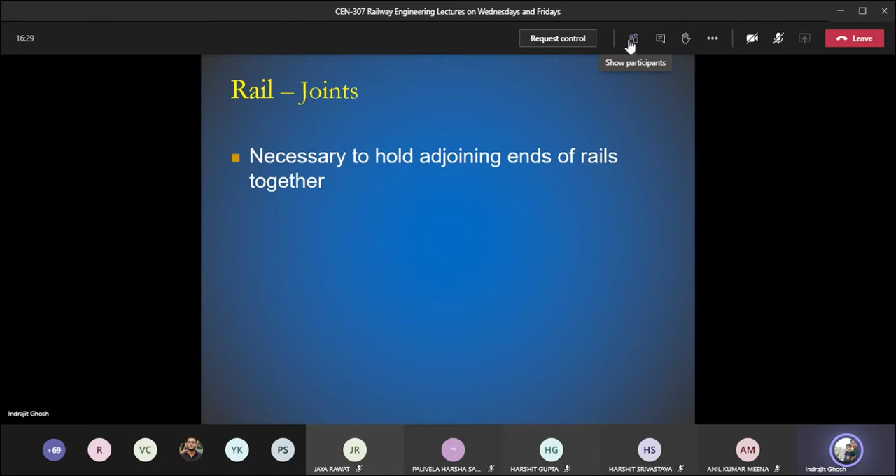So the next topic that we are going to discuss, again related to rail, is the joints of the rail. First of all, what is a rail joint and why do we need rail joints? Why is there an occurrence of rail joints? The first thing is that we have seen several times that rail is of finite length.

There are several disadvantages associated with very long rail. So we need to put two rails, and at the same time we need to make sure that the adjacent ends are at the same place. We should have some sort of mechanism that maintains the correct position, both in the horizontal and vertical plane.

So what does it mean by vertical? If this is the joint, if there is a gap in between, you need to make sure the height here and the height there are going to be the same. You use a fish plate with nuts and bolts, but you need to make sure that this level and the level of the previous rail are going to be the same. So this is in the vertical plane.

And what about the horizontal plane? If we have a rail like this, and we have the other rail, we have to make sure that the rail heads, web section, foot, everything is at the same level. Otherwise horizontally you will see the other head of the rail misaligned like this, which will create a lot of problems for smooth running of the train. There will be extra impact and extra force exerted by the wheel at the joint location, both in the horizontal and vertical plane.

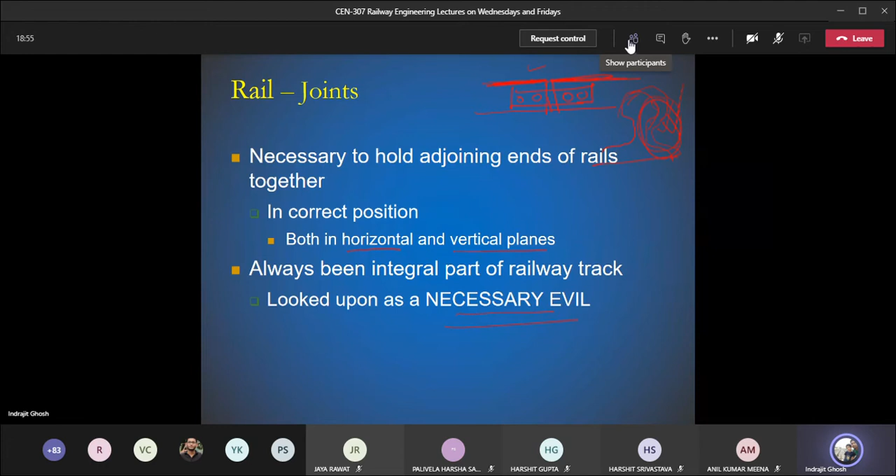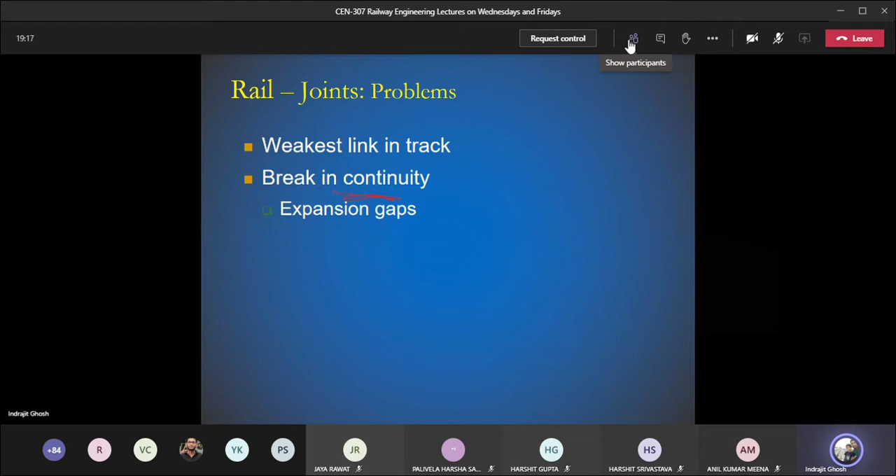So joints, what are the problems? I have two slides to talk about the problems. Weakest link, break in continuity. If it were a single rail there is no problem, but when multiple rails are joined at the joint location, continuity is broken. Now when continuity is broken, you need to think about the longitudinal stresses due to temperature variation. You need to keep a gap, known as the expansion gap, that will accommodate the expansion and contraction due to temperature variation.

There can be imperfection in levels of the rail head, horizontally and vertically. There can be problems, there will be blow of wheels. We have seen that one type of creeping is explained by what is happening at the joint, the percussion theory - so blow of wheel.

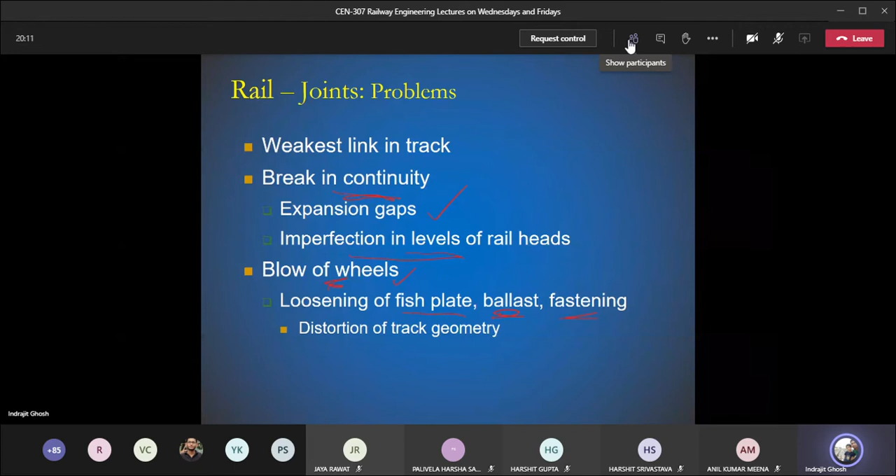Whenever there is extra force exerted at the joint location, not at other locations of the rail, there can be loosening of fish plates. There can be issues with the ballast underneath the joint, and problems with the fastening. Over time you need to make sure they are not loose and not coming out, because if those are loose, the track geometry will change over time, and if labor is not sent to ensure things are in proper order, there can be chances of accidents. Wear and tear of the rail, as we saw yesterday, means there will be extra force at the joints, causing metal loss at the joint location.

We have seen the battering of rail at the joint location, so track components are going to have wear and tear. At the same time, rolling stock is affected too - if fish plate nuts and bolts are not in proper order, if they're loose, or two rails are not horizontally placed properly, the extra jerk you feel at the joint location affects the health of the rail and the rolling stock, the train vehicle as well, because there are many moving parts that will create problems.

It's just like buying a new vehicle and driving on a road full of potholes, or where construction is going on and there's no street light so you can't see the road properly. Sometimes your vehicle can be damaged because you may not understand the depth of the pothole, so the health of the vehicle deteriorates. Similarly, in railway engineering, if the joint is not properly maintained, it can affect the health of the rolling stock as well.

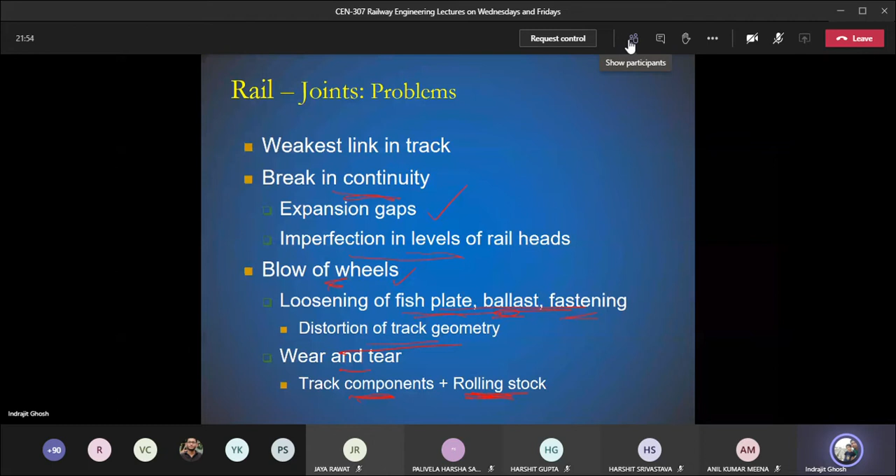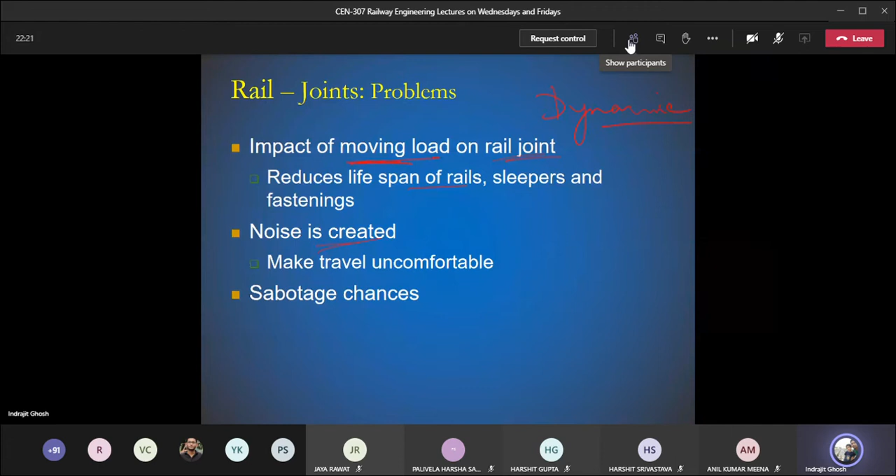What are the other problems? Impact of moving load on rail joints. As there is moving load, dynamic load, that reduces the lifespan of the rail, sleepers and fastening, particularly at the joint location. Noise is also created - when you're a passenger sitting inside the vehicle and you hear a noise, that is nothing but the wheel hitting the joint location.

So you feel uncomfortable. There are also sabotage chances - there can be a person who wants to damage the reputation of Indian Railways or terrorize people. What they can do is remove the fish plate, and once they remove it, they can remove the rail. I remember an accident in West Bengal, Jnaneswari, at the border of Odisha and West Bengal, where a train accident happened because a portion of the rail was cut. During investigation, they found that fish plates were removed and some portion of the rail was taken off. So if you don't send people to keep an eye, that's one problem. At the same time, the kind of devices we use are easy to remove, so there are chances of sabotage.

Increased fuel consumption - in case of roads, if you have a smooth road, your fuel efficiency will be comparatively good, giving better mileage. In railway engineering, it has been observed that more fuel is required if you have a greater number of joints on a track, because of the expansion gap. Extra force is required to hold the train over joints. These are the problems - there are several more, but only 8 to 10 are listed here.

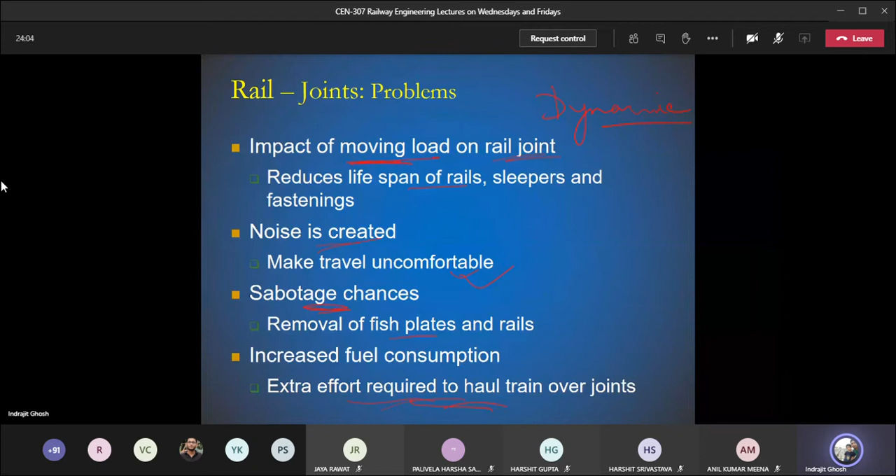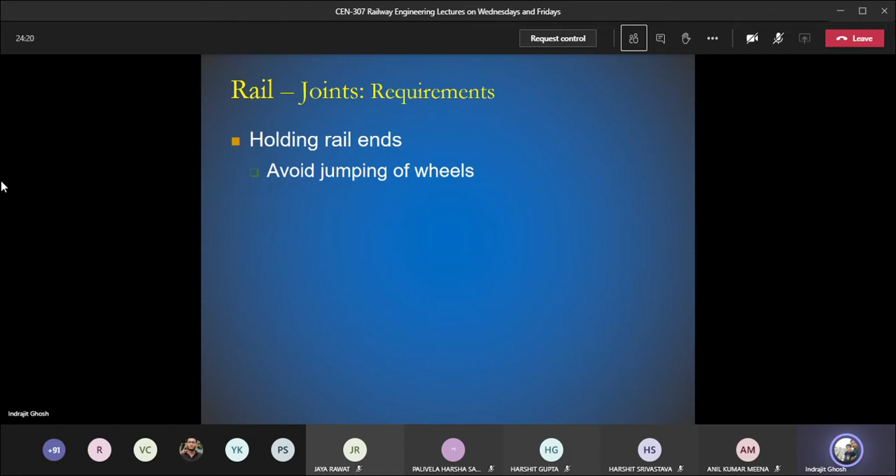Now, whenever we talk about this component of the track - joints - we need to think about the requirements, the purposes it needs to serve. The first one is holding rail ends together. If it doesn't hold the rail together, what happens? The expansion gap increases, the fish plate becomes loose, and the wheel jumps a larger distance - this can be in the longitudinal direction over higher distances, or even an elevation jump, a level jump. We need to make sure this kind of jumping does not occur.

Next, avoid deviation of the wheel from its normal path of movement. So if this is one rail and this is the other rail, if they are not joined very accurately and it moves to the side, then obviously the wheel has to deviate, and that is not at all welcome. So we need to avoid deviation of the wheel - it should move as it is, there should not be any deviation.

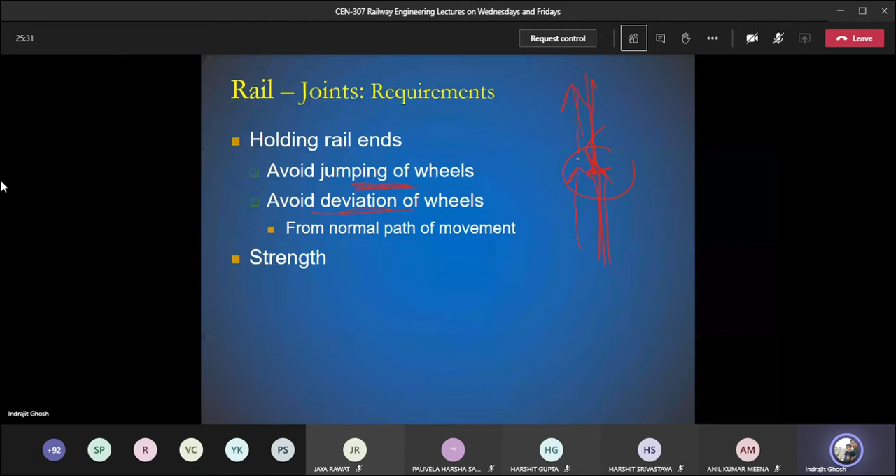Strength and stiffness - the kind of strength and stiffness the joint needs to provide should be almost equal to the normal rail. So two rails are being joined, here is one rail and here is another, and we put some extra material - fish plates, or welding, whatever you call it. We need to make sure the finished product provides the same strength and stiffness as the parent rails do. Expansion gap should provide enough space for contraction and expansion due to temperature variation - it needs to hold a certain gap in between.

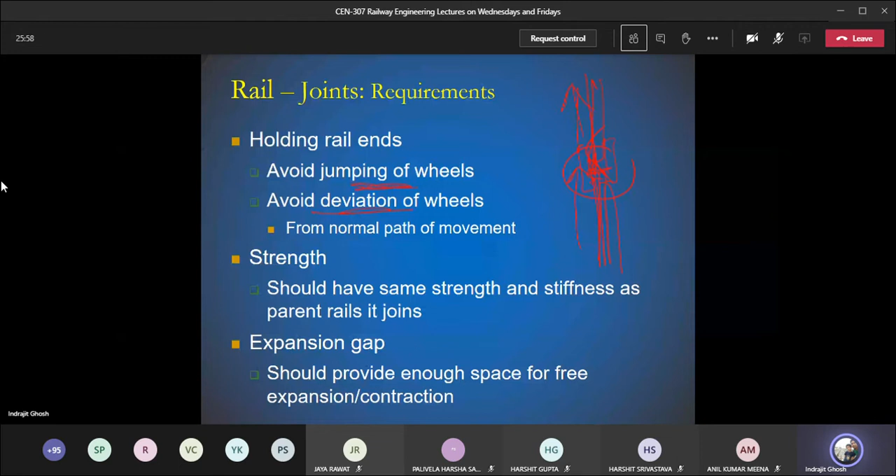Flexibility in terms of removal or replacement, so joints should not be such that yes, it is a weak point, but we are doing so many things at the joint. When the rail reaches its service life, we need to throw it out or go for renewal because the wearing is really high. It should not happen that you are scared of dismantling the joints, so you should have enough flexibility. The joints should not be so complex that renewal of the rail becomes a huge problem.

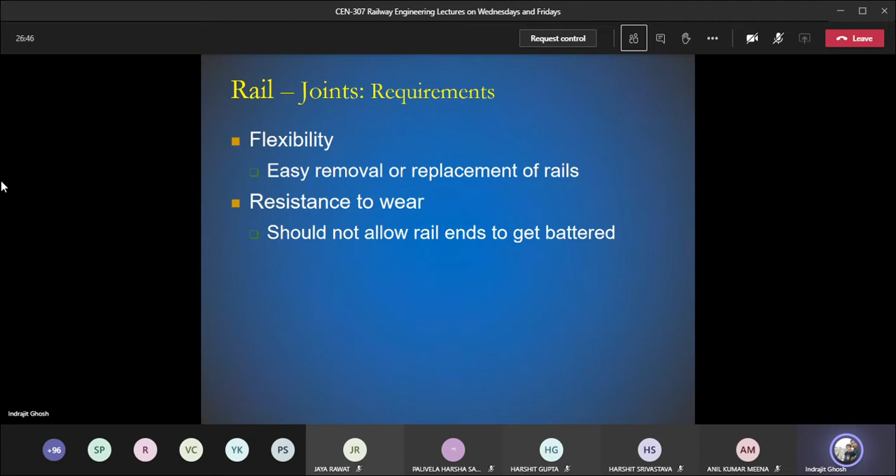Resistance to wear should not allow the rail ends to get battered. Yesterday we saw this battering is responsible when we talked about creeping. Wheel load comes with vertical and horizontal components, responsible for creeping in the rail due to percussion theory, and this causes a hammering action where the rail head gets flattened and battered. It should not allow the rail heads to get battered, so we need to make sure the joint is really strong and is not getting battered.

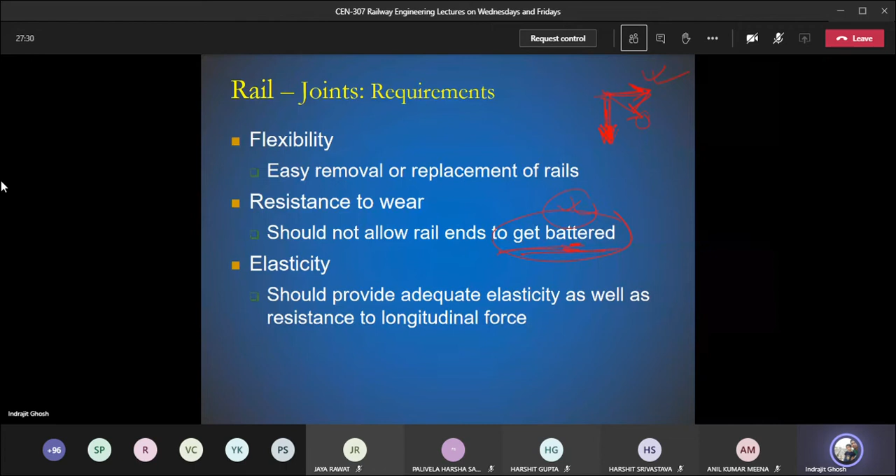Elasticity: provide adequate elasticity as well as resistance to longitudinal force, since the train is moving in a particular direction, so it should provide enough elasticity. And cost, the last one, no matter which track component you are discussing, you need to make sure the initial and maintenance cost is low. If you join Indian Railways later and want to use a modern term, you will say LCCA, life cycle cost analysis. If you do that, you should be able to say the life cycle cost is minimum.

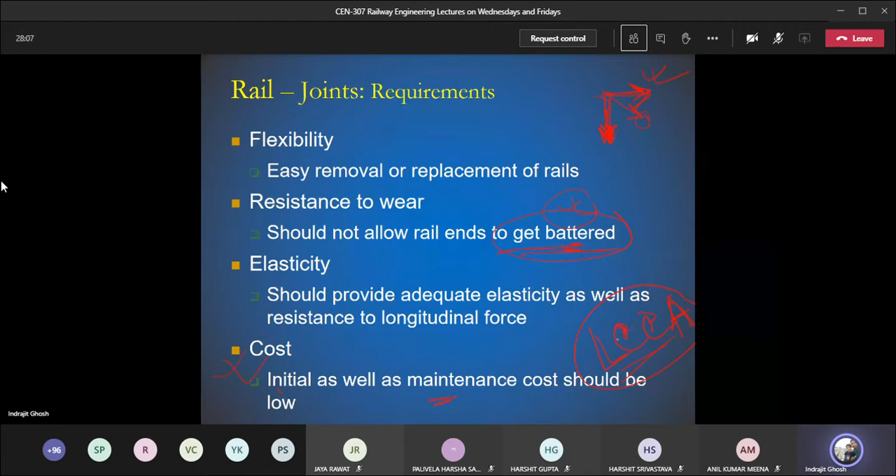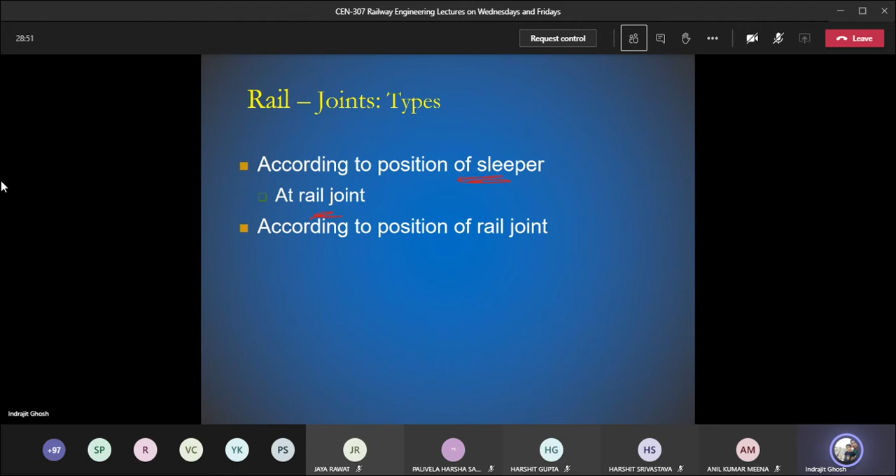Now let us see certain joint types. Rail joints can be classified in various ways. The first classification is based upon the position of the sleeper. The rail rests upon the sleeper, the sleeper rests upon ballast, and in between the two rails we have the joints. So based upon where the sleeper is, we have some classification regarding the joint location. The other classification is related to the position of the rail joint itself, where it is located. We will see them one by one, starting with the classification based on the position of the sleeper.

The first one is the supported joint. We have seen that the joint is the weakest location, there are several problems, nuts and bolts can become loose, and it can be taken away by people to cause trouble. So the original idea when things were being invented was that we can put a sleeper at the joint location, so the rail joint rests on a single sleeper. That particular sleeper is known as the joint sleeper.

So this sleeper is known as the joint sleeper, for the rail joint. It appears that we are making sure this location is not really a weak point, but it has been observed over time that because of moving wheel load, shock, vibration, expansion gap, the wearing and tearing is huge for this particular sleeper. Maintenance is a huge difficulty for this sleeper class. The sleeper posed as the joint sleeper needs to be renewed at frequent intervals, unlike other sleepers. So we stopped using it at present. It used to be one of the supported joints, supported with the help of a joint sleeper, but that is now obsolete and not used.

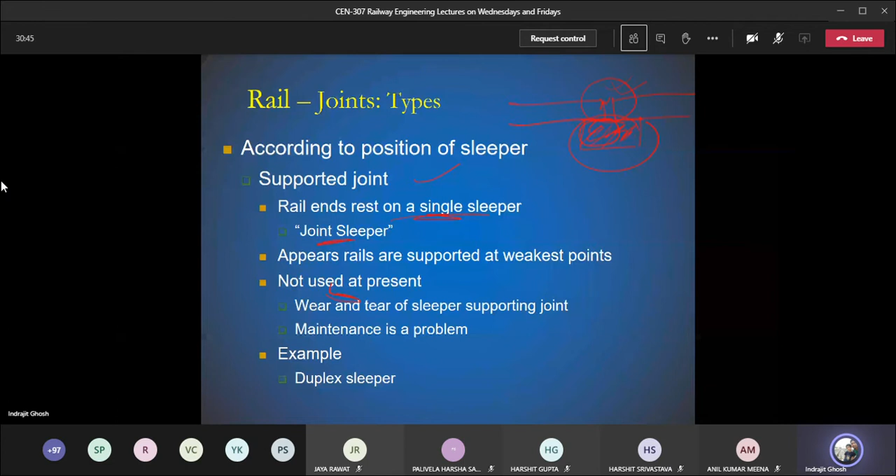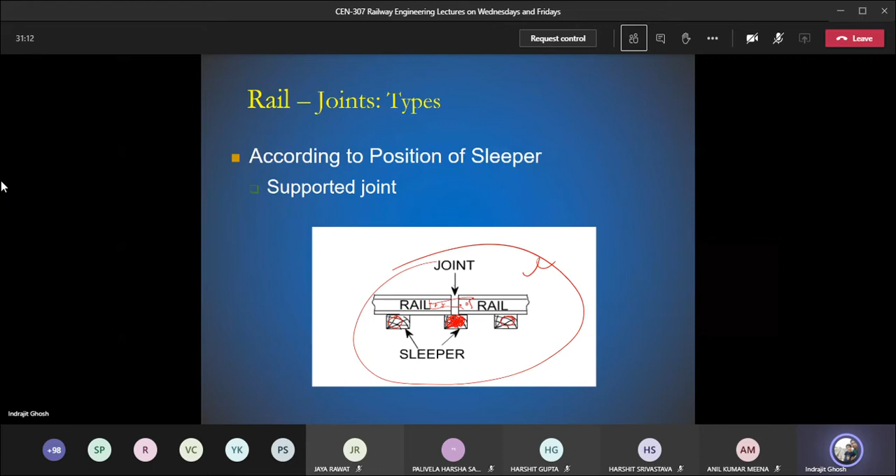The example is the duplex sleeper. There is one slipper, another slipper, and a third slipper, with the rail joint. It won't show the nuts and bolts, but they will be there. This is the joint sleeper and this is a supported joint. Maintenance of this sleeper is very difficult, that's why wearing and tearing is very high, and that's why we do not use it nowadays.

So what do we use nowadays? Any idea? Do we use a double sleeper, or a different kind of sleeper? Okay, do we leave the wooden sleeper and put an iron sleeper instead? Is it like that? What is your opinion? Can anyone tell? With respect to the position of the slipper, where it will be placed, or if there is a special kind of slipper, maybe made thicker, stronger, or of a different material. Any guess from your side?

The one which we use everywhere, which we see everywhere, used worldwide, is known as suspended joint. The rail ends, the joint location will be somewhere in the middle, in between two sleepers. So we have two sleepers on the sides of the joint.

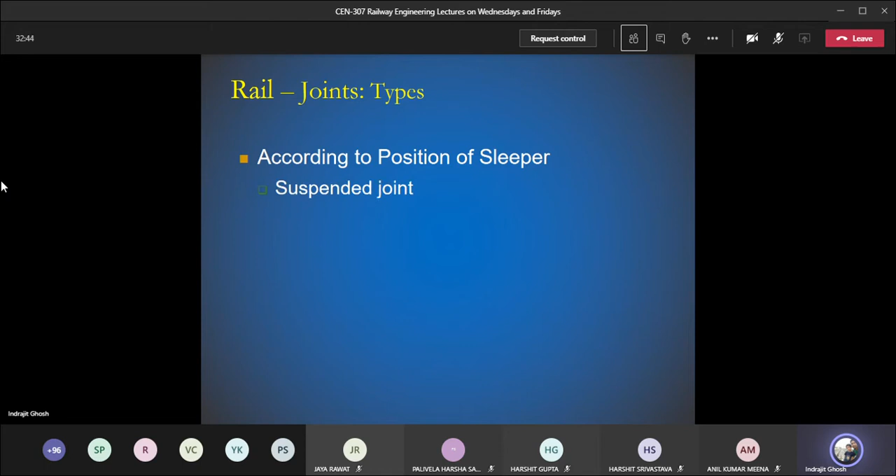So there is a cantilever portion. Let me draw a different diagram. We have one slipper here, we have another slipper here. Now if we join them, some portion of this rail is acting as cantilever, here also cantilever, and these are joined. So there is no slipper in between.

We have seen this photo earlier, right? We said that there is a special name for this particular slipper. What are the names of this slipper? If it is at the joint, we call it joint sleeper. When those are at the sides and it's a suspended joint with a cantilever portion, what slipper do we call them? What is the specific term we use to express the name of this slipper? Shoulder sleeper. Yes, shoulder sleeper.

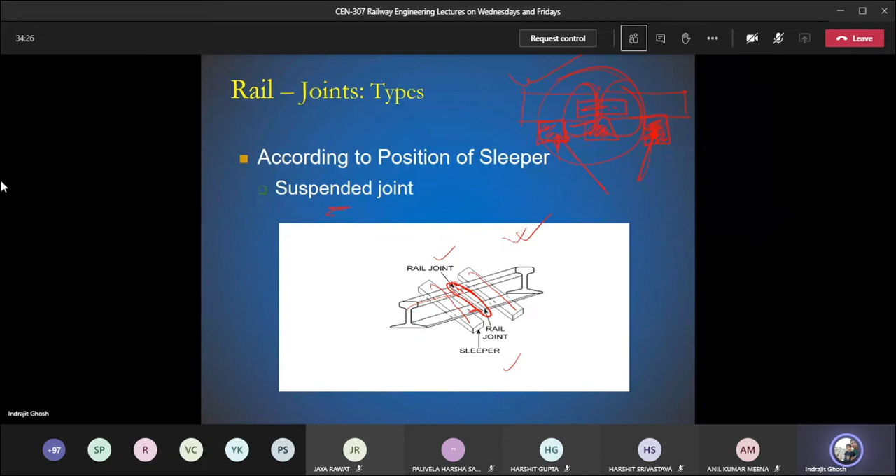We have seen shoulder sleeper when discussing sleeper density, the spacing between the shoulder sleeper, the intermediate sleeper, and other things. So that's why. This type of joint is really good and is used worldwide.

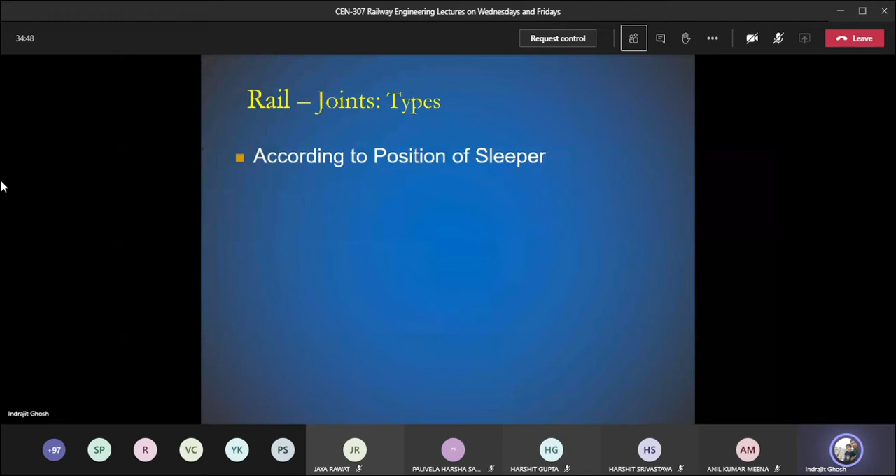Is there any other variation? In India, we do not have any variation, but if you go abroad, in some other countries with different track systems, you will be able to see some other special kind of arrangement.

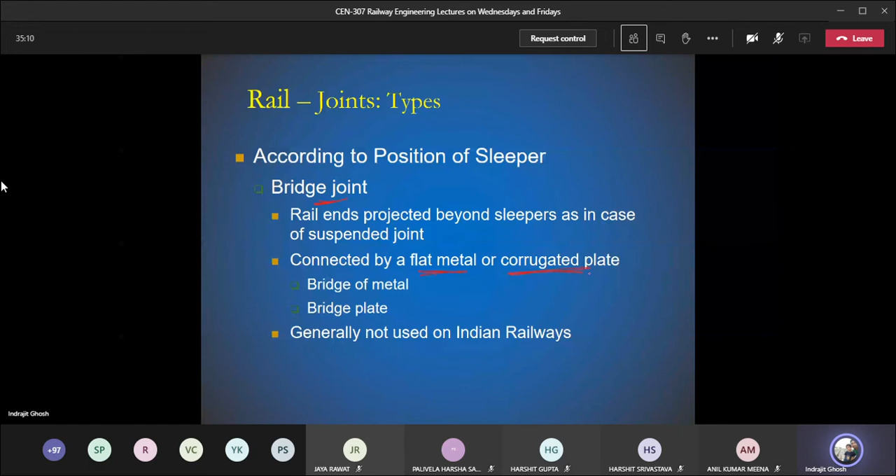The third one is bridge joint. So we have a suspended joint, but at the same time, in between the two sleepers, those shoulder sleepers, there is a connection made by a flat metal or corrugated plate - a metal sheet or corrugated sheet, as you must have seen from structural engineering knowledge. We call it either bridge metal or bridge plate.

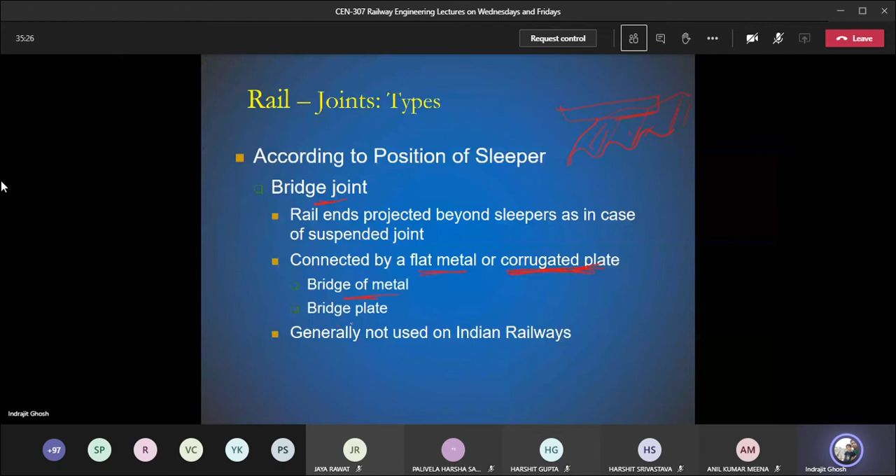Those are mainly available in the United States. Do you remember any particular instances where I talked about United States trains? What was the reference? Anybody remember? The kind of goods they carry - one of them carries heavier loads, and so the track structure is slightly different.

Yes, correct, absolutely. The reference was that the depth of the ballast cushion underneath the sleeper is going to be equal to sleeper spacing in case of the United States. But we do not follow this in India. The reason is that in our case, the sleeper density is comparatively such that the distance between the two sleepers is larger, but smaller in their case.

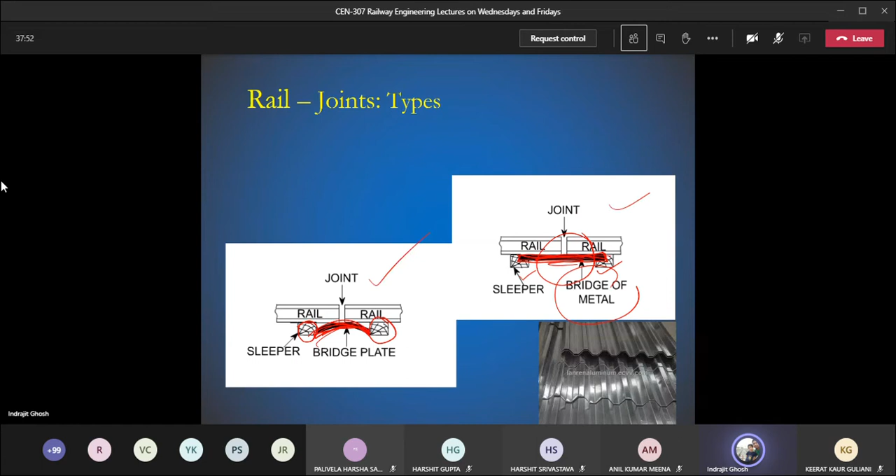The reason is that they mainly use trains for movement of goods, for movement of freight. So when they transport bulky amounts of material, heavy volume, huge weight, they may require some extra support at the joint. That may be the reason for this bridge plate or bridge metal. This is not available in India - we do not see it, but it's available particularly in the United States.

Now next classification is according to the position of the rail joint. The last one was position of the sleeper - when the sleeper was below the joint, we call it supported. When it was cantilever, we call it suspended. When we have one extra sheet of metal, we call it bridge. Bridge is a modification of suspended.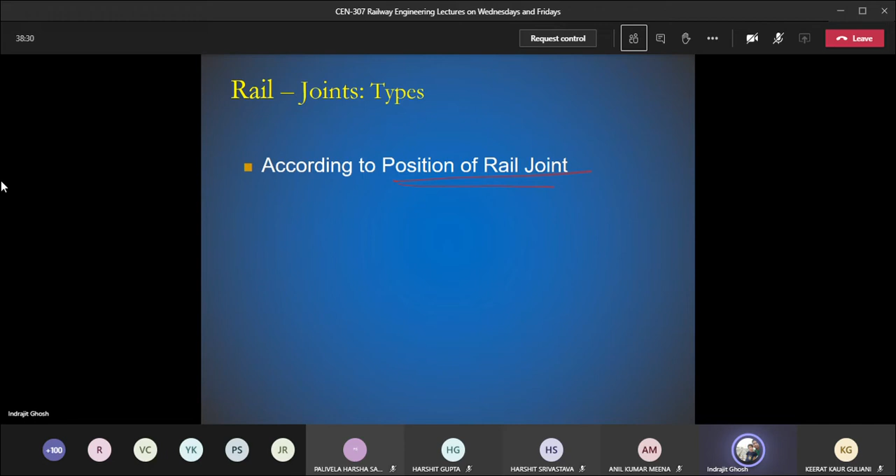Now I am asking you with respect to the rail joints, how it is going to vary. The first one is square joint. Let us see here a photo of square joint - the track joint on this side is exactly opposite of the joint on the other side. This is known as square.

What could be the other classification? It seems that the other classification will be such that the joint is not exactly opposite to the other joint, right? If it is not happening, we will not call it a square joint. It is kind of here, here, here, here, here, here. So when we have something like this, we call it staggered.

Staggered. S-T-A-G-G-E-R-E-D, staggered. So staggered joint, where is it common?

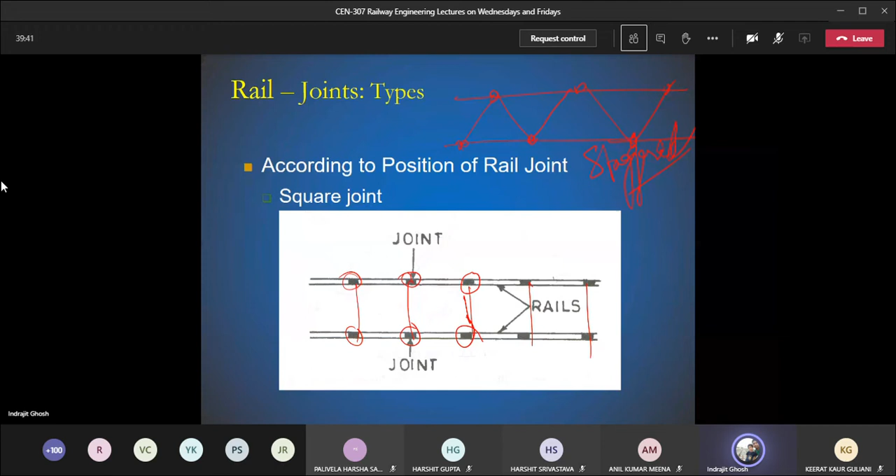In case of... when I will be showing you the photo, you will be able to understand. It is at curved location. When we have a curve, and we have laid the rails, we need to make sure that the joints are not opposite to each other.

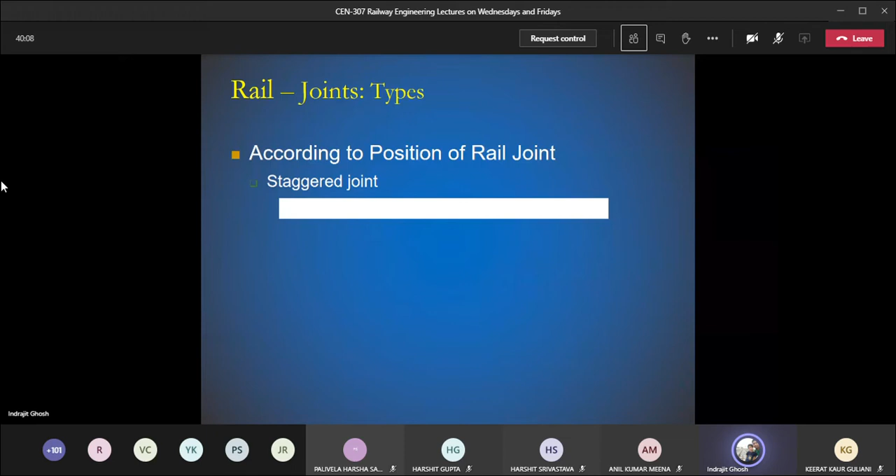What is the reason? The outer wheel would be moving slightly, covering a larger distance in the same amount of time. So you need to accommodate for that difference by creating that gap in the joints - basically in order to impede the effect of the centrifugal force.

So somewhat staggered. In case of highway engineering, did you listen to the word staggered? Suppose you have a junction, one road crossing another road - we call it 90-degree intersection, right? So if we have a road crossing like this, what do we call it? What kind of intersection?

Skewed, right. And what about this? This is known as staggered intersection. So 90-degree perpendicular to each other is one type, this one is skewed with a certain angle, acute or obtuse.

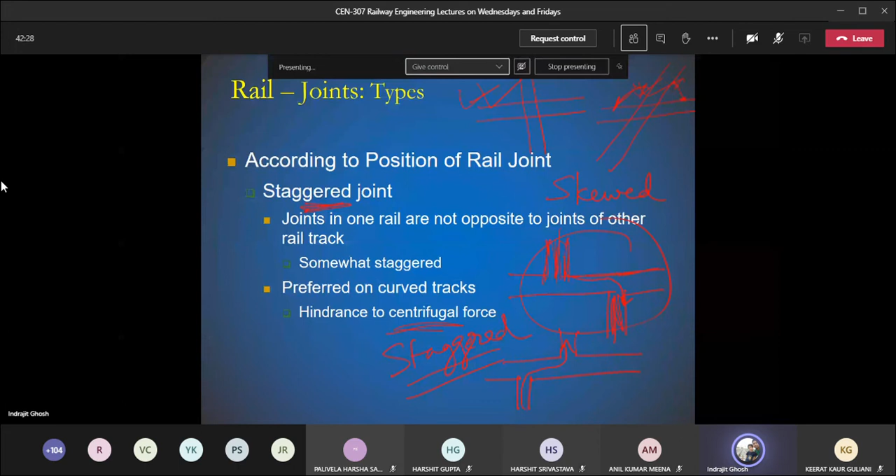And when we have one road, but at the particular junction, these two roads are not opposite to each other - rather, the person coming from this road who wants to go there has to come like this, take a right turn and go like this. Similarly, one person wanting to go on this particular road has to follow this path. So this kind of intersection is known as staggered intersection. So staggered joint, all of you can remember, is common in case of curves.

Now let us directly come to the welding of rails. So how would it help in hindering the centrifugal force? What is the effect on centrifugal force?

Centrifugal force is a tendency that the vehicle might move towards the outside of the curve - it has a tendency to get pushed out. So if you have staggered joints, shouldn't it be more difficult, because now both the wheels will... oh okay, we're talking about the joints. Yes, we are talking about the joints.

So if centrifugal force is being applied here, we have one weak point here, and another weak point here. That's why we got rid of this, and we have one here, another there, another there, another here.

So let me discard this. Just hold on, okay.

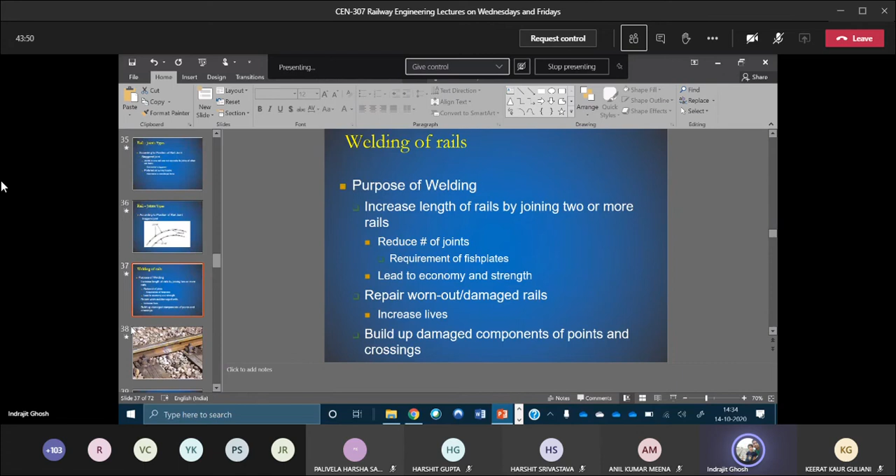Yes, so welding of rail. Now, one thing you can observe - I did not discuss the things we see in the joints. I am not going to talk about the fish plate, nuts and bolts and their specification now, because that will be discussed during the discussion of fastening. So we are directly going to the welding of rail, which is done at the joint location.

So purpose of welding - there are certain purposes it is going to serve. First one is that though I am not going to show you the joints, you can say we are trying to get rid of the joints. We are putting some kind of material, and at the same time we are trying to save our cost. Why?

At each joint you need to put fish plate, nuts, and bolts, and at the same time, you know that they can loosen and cannot be at their initial health over time. So you need to go for regular maintenance. If you sum up all those costs, you will be able to see that you will save some money if you go for welding.

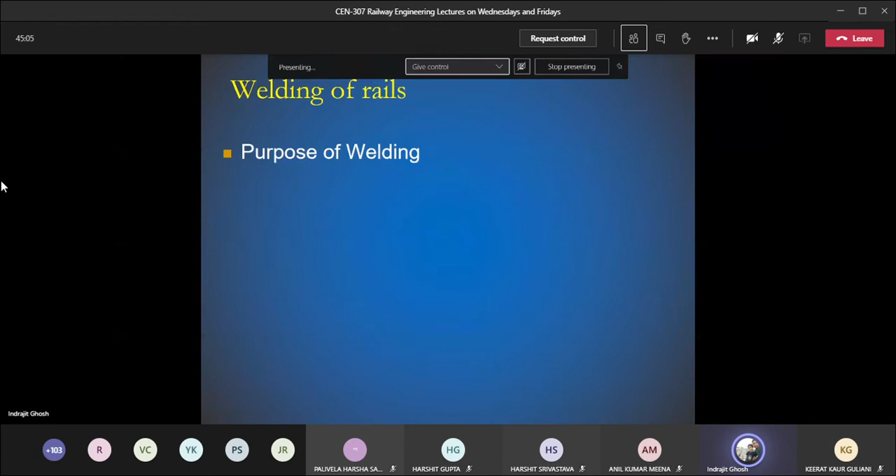So let us see some points. Increase length of rail by joining 2 or more rails. Until now we have talked about 2 rails, but with welded rails, there are instances where we join many rails. So we are reducing the number of joints, and we do not need as many fish plates, nuts, and bolts as we were requiring earlier. This leads to economy as well as strength.

Why do we say strength? Because the material we are using, though it seems to have the same property as the original rail, is joined by nuts and bolts fixed to the rail with wrenches, screwdrivers, and other tools. Over time, due to vibration and dynamic loading, they become loose, so strength will not remain as it is. But when we go for welding, it provides better strength.

Repair of worn out or damaged rail. We have seen that in some cases when there is wear and tear and metal loss, we throw away the rails, or replacement and renewal of rails goes on. But in some cases we can repair the worn out or damaged rails, and in that way increase their service life.

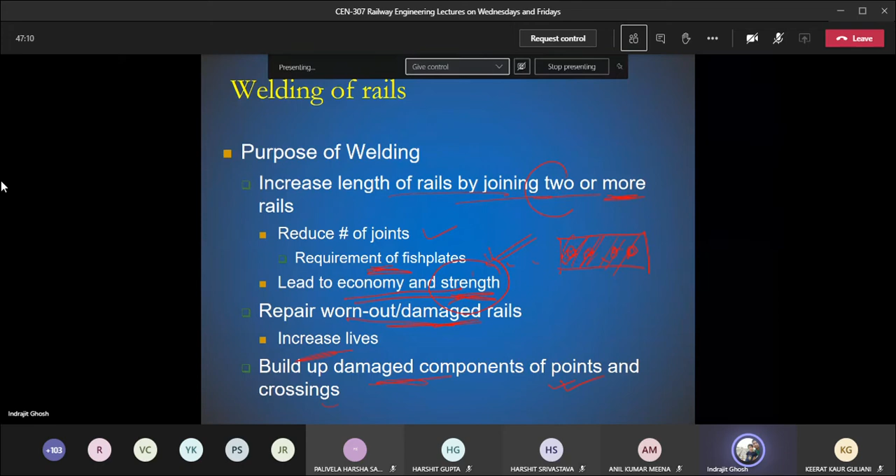You may recall, when we talked about the first method of reducing creeping, we said pulling back the rail, though it is not very successful. So we sometimes use crowbars and hooks, putting the bars and hooks through these holes, while some people hold the other side of the rail, and we are able to drag it.

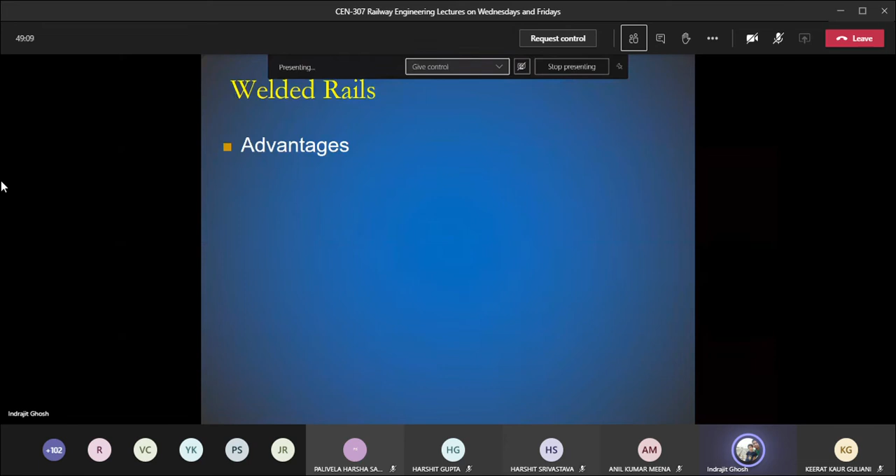Welded rails have several advantages: they increase life of rail, increase strength, and reduce construction cost. You may think there will be some kind of setup needed to go for the construction cost or the fixing of 2 rails with the help of welding, but there are several methods of welding, and nowadays we could reduce the cost drastically.

So now for every 12 to 13 meters we have one rail on this side, one joint on this side, another joint on the opposite side. If you calculate the cumulative expenditure for all of this fishplate, nuts, and bolts, you will see that construction cost is going to be lower in case of welding. Even the maintenance cost is going to be lower because you do not need to send people as often.

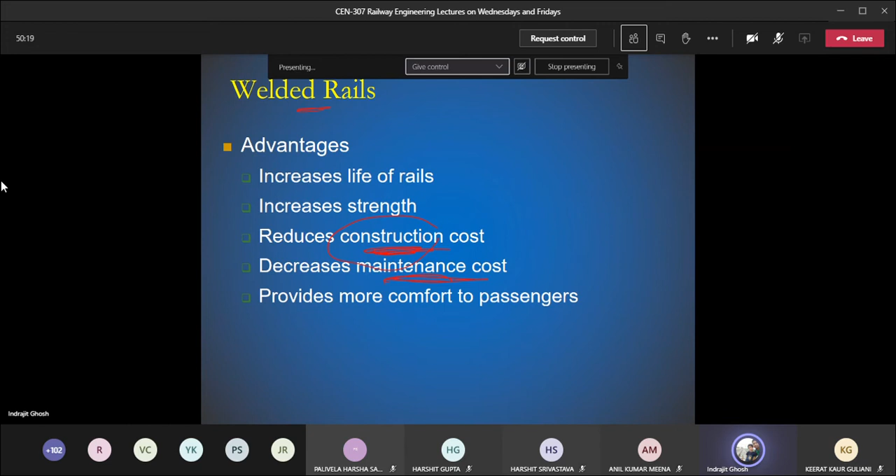Welding provides more comfort to the passenger because the wheel is not moving along the gap left for expansion and contraction. It also reduces creeping, because one theory, the percussion theory, says that at joints there is wheel load, causing creeping. Even longitudinal stresses generated due to temperature variation can cause creeping, and we have seen accidents where the line buckled due to this. Since those joints are gone and we have put metal, it reduces the creeping.

Welding also reduces risk of sabotage and accidents. For sabotage we cannot do much, only proper surveillance or maybe a very complex kind of setup at the joint. As for accidents, if we are not sending people quite often to the site, there will be fewer accidents.

Hey, please mute yourself. Just hold on, I need to mute him. Okay, I think he's gone.

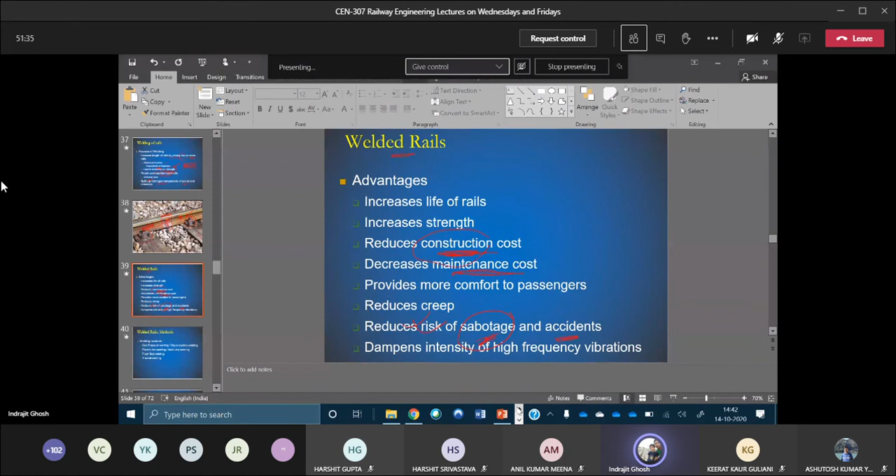The last benefit is that welding dampens the intensity of high frequency vibration. There will be shocks and vibration generated because of the joint, but when we have a welded joint, that reduces the intensity of the vibration to a great extent.

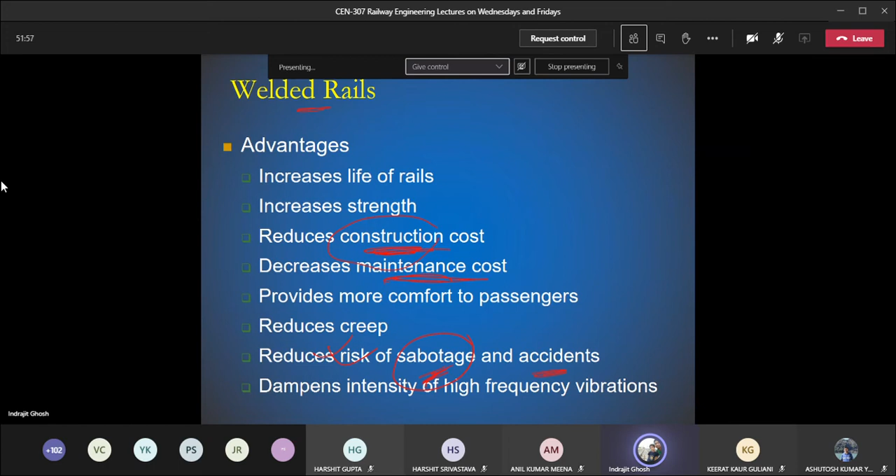There are several welding methods. We will not go through them the way mechanical engineering people do, but roughly discuss their pros, cons, quality, and whether they can be done at the site or have to be done at the plant itself. First is gas pressure welding or oxy-acetylene welding, where we use oxygen and acetylene gases. Second is electric arc welding, which involves electricity as well as metal. Third is flash butt welding, involving flashing, fusion, and smoke coming out. Last is Thermit or chemical welding.

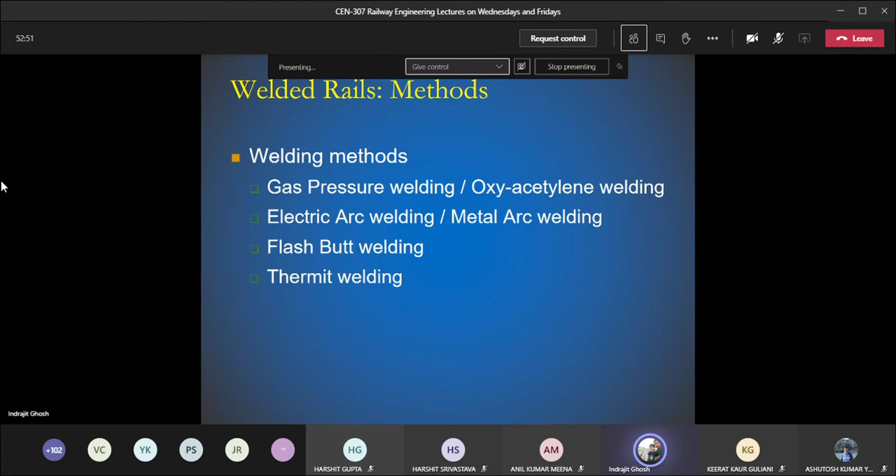Let us look at some slides. First is gas pressure welding. For this you need two types of gases: oxygen and acetylene. Intense heat is generated when we combine oxygen and acetylene. The rail ends are brought close to each other and heat is applied through a burner. We'll see a photo in the next slide.

Burners are connected to an oxygen cylinder as well as an acetylene cylinder. Whenever we have a burner, we need to regulate it, just like a normal gas cylinder setup with a regulator and two tubes: one from the oxygen cylinder, one from the acetylene cylinder, leading to the regulator and then the burner. So the rail ends are brought together and heat is applied.

As heat is applied, the metal melts and deposits molten metal on the rail. It's a very simple apparatus, very good from a mobility point of view. We need two cylinders, and both stationary as well as mobile units are available. Stationary means it is not portable, so you need to go to a designated place for welding, setting up the plant near the location where you are laying, doing renewal, or welding the rail. Mobile units are portable, and you can take them to each joint and do the fixing.

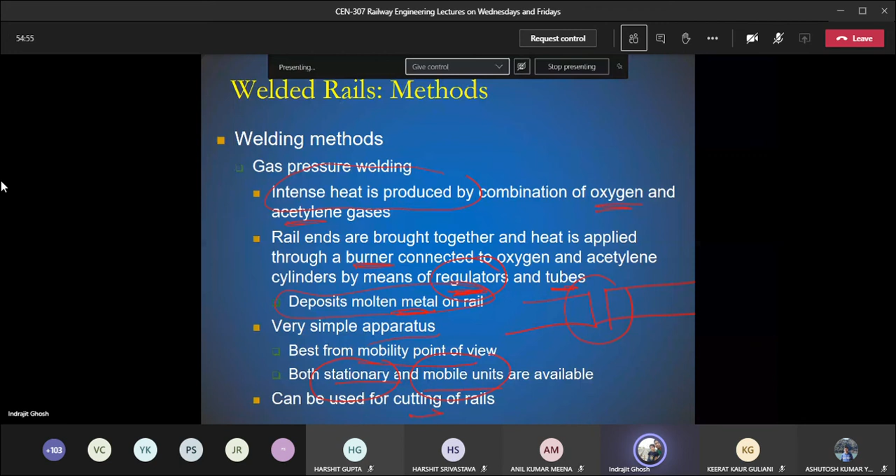The same setup can also be used for cutting rail. Sometimes you need shorter lengths of rail, particularly during maintenance, so in order to cut the rail you don't need anything else, you can use the same gas pressure welding setup.

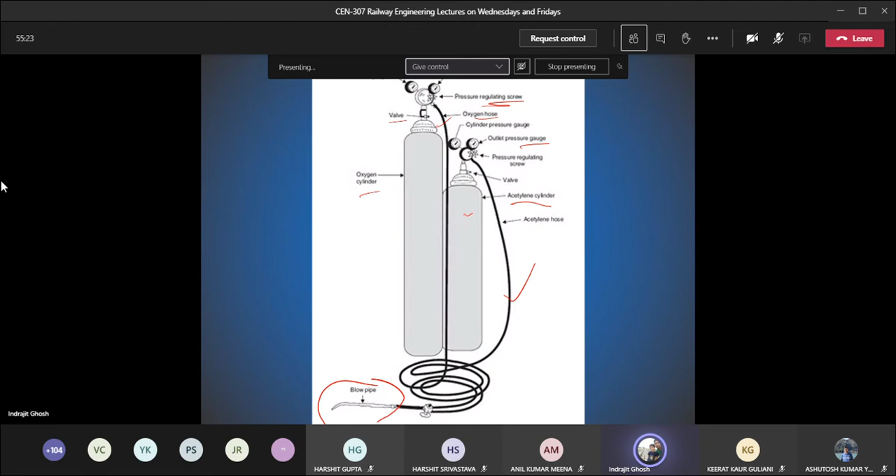You can see there is the acetylene cylinder, this is the oxygen cylinder, there are valves, gauges, a hose or tube, and a burner, the blowpipe, along with a pressure regulating screw. This is the setup for gas pressure welding. It is also used for repairing worn out rail or damaged portions of points and crossings.

So that is a general property of this welding. The quality of material deposited is good, and it is cheaper compared to flash butt welding.

Reliability is high. The kind of end product you are leaving, it is going to serve the purpose for a long time. You do not have to bother much about whether the work was done properly, checking again next month or the third month - you can completely rely upon it.

But the main issue is the limited output. It takes some amount of time to do this particular kind of welding. There is difficult as well as irregular availability of gas, oxygen and acetylene, which need to be in cylinder form. These are very difficult to get nowadays, and sometimes become irregular. There is only one plant in West Bengal which offers this kind of welding, so it is being phased out gradually.

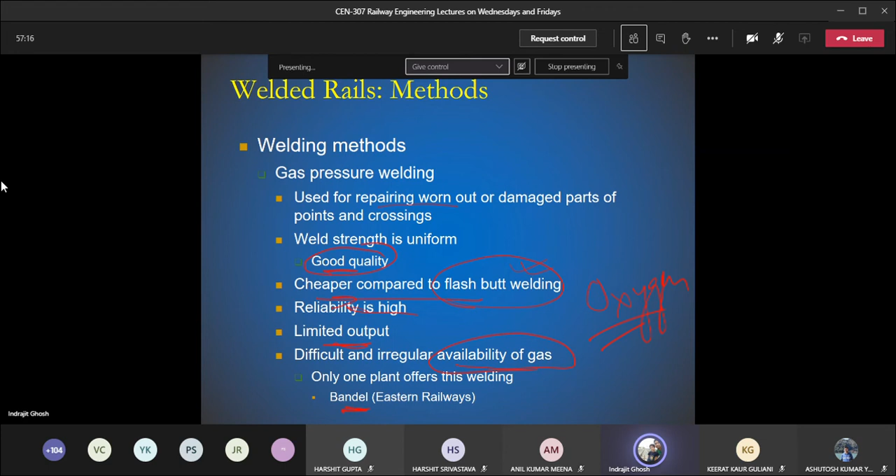We are not using it, though it has the provision of being mobile as well as stationary. It was cheap compared to flash butt welding, and reliability was good, everything was good. It can be used to cut the rail, fix worn out or damaged rail portions, but the availability of gas is an issue, output is very limited, and there is only one plant in West Bengal.

The second one is electric arc welding or metal arc welding. Here, electric current is passed through the rail, and at the same time through a rod, which is nothing but one electrode. You have two rails which have to be fixed, where you have to do the welding.

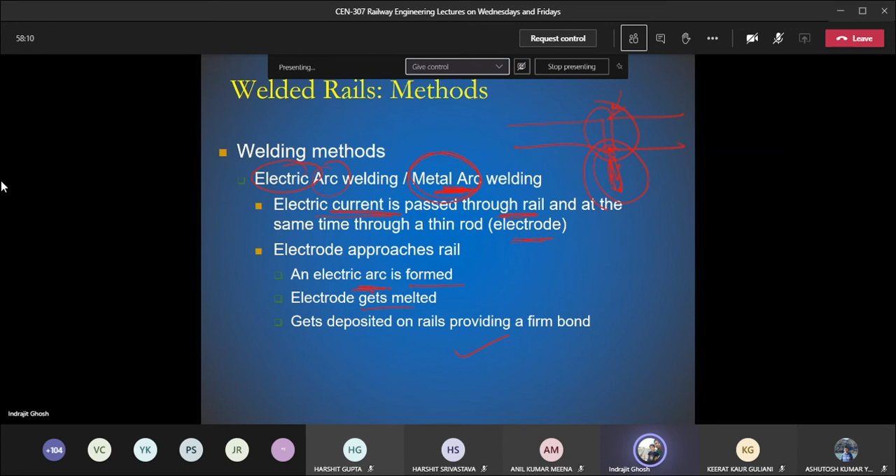So the third component is an electrode. Current is first passed through the electrode as well, so an arc will be formed - that is why we call it metal arc, also known as electric arc. The arc is formed, the electrode gets melted, so the thin rod that you are using gets melted and is deposited on the rail, providing a strong bond between the two rails. In that way, we go for the welding.

In case of electric arc or metal arc, there are mobile plants available, so it can be set up at multiple places. It is portable, easy to handle, and consists of engine, generator and accessories to make sure that you can pass the current through the rail and the electrode. At the site, you need a generator because there may not be a power source. It is used for building up worn out points, crossings, damaged rail, and other small welding operations.

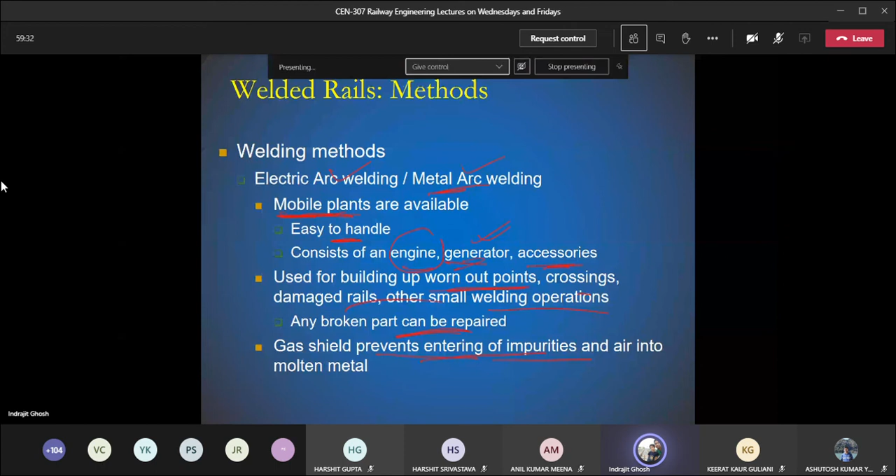Whatever the damage is, you can repair it - any broken part, any damaged part can be repaired. At the same time, one of the advantages is the gas shield that gets generated because the metal arc creates an atmosphere with very high temperature. This gas shield prevents entering of impurities and air into the molten metal. So whatever you see at the end of the work, you are sure there are no impurities because of the very high temperature, and there are no air voids in the molten metal. That's the specialty of electric arc welding.

The third one is related to flash butt welding. Here also we need to send a powerful current through the two rails. The width of the gap is varied until the two ends are heated up to the required temperature. So bring them together, apply current, make sure they touch each other, brought into contact with each other - as soon as they are brought into contact, there will be a flash, a bright light will come up.

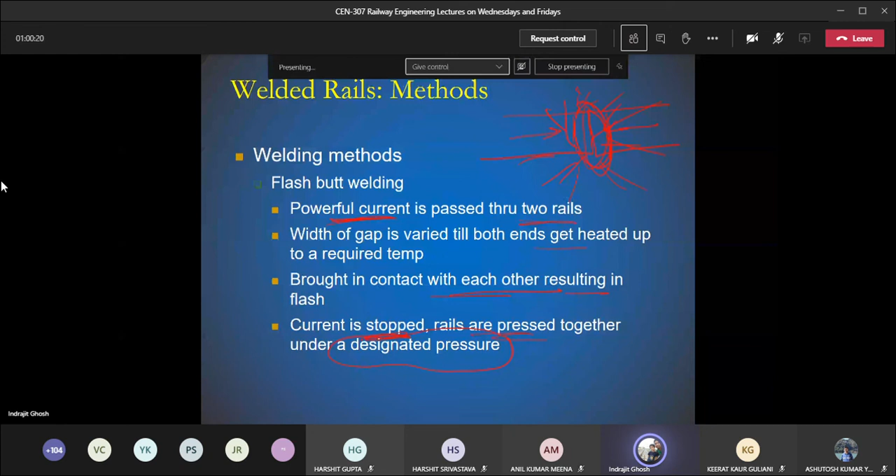At that time, stop the current and press the rails together, making sure you have the designated pressure. If we can do that, we'll see the rails joined together - we have a welded rail. This is very high quality, again using high temperature, and the cost of welding joint using this method is quite low.

When we were discussing the gas pressure method, with cylinders for oxygen and acetylene, we said this is cheaper than flash butt - so cost of welding there is very low. Now gas pressure welding cost is lower than flash butt, which is really good, but there are several disadvantages we've seen earlier - the availability of gas and limited output. So cost is much lower, but other issues remain. Flash butt can be adopted more economically and efficiently at the workshop - high quality, and the kind of setup needed to bring the two rails together, send the current, join them, and stop the current.

It has been observed that you do not need much accessories, but it needs to be done in a welding plant. So you cannot do it for small jobs at the site. If you want to do that, it will be uneconomical because the cost is increasing. So you need a plant with that kind of source of current, and you have to send powerful current.

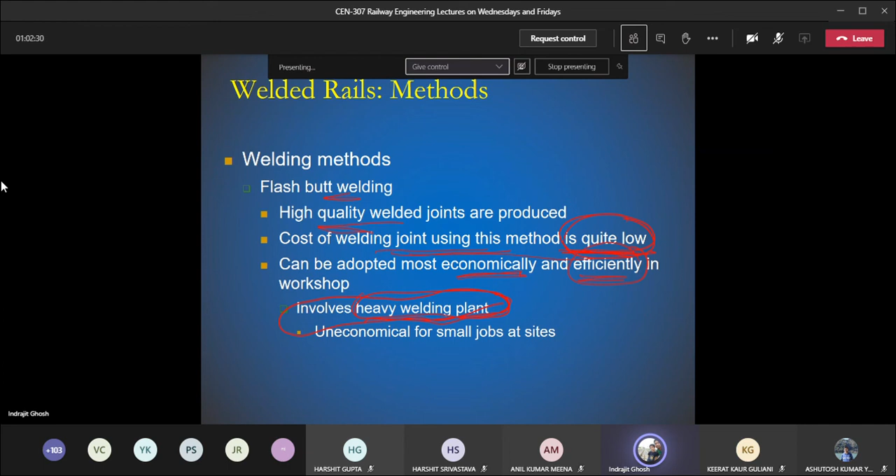And the last one is thermit, or the chemical welding. This is the most popular one. It involves the use of two things: one is aluminium, the other is iron oxide. They are mixed in powder form and ignited. So aluminium plus the oxide, ferric Fe2O3. On ignition, when heat is given, there will be a chemical reaction.

First of all, there will be generation of intense heat, a huge temperature rise. The temperature observed in this case has been found to be in the range of 2500 degrees Celsius. So this is very exothermic in nature, the chemical reaction between these two.

Now when this is being done, what is the end product? Fe and Al2O3, plus heat. Now what is Fe doing? That is getting separated away and deposited in the gaps of the preheated rail ends.

So the rail is also preheated by setting up some kind of furnace at the bottom of the rail ends, at the joints, so it gets deposited. Al2O3, the aluminium oxide, is lighter, but it floats on the top and forms the slag. So slag formation happens for this, and heat is already there.

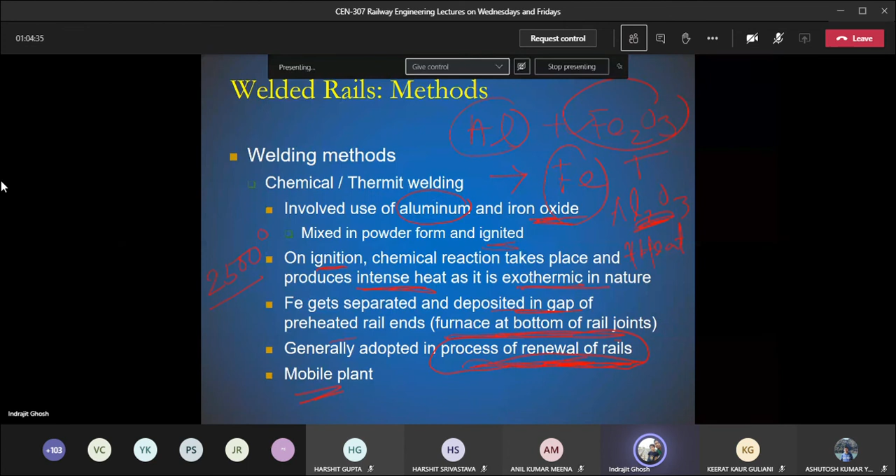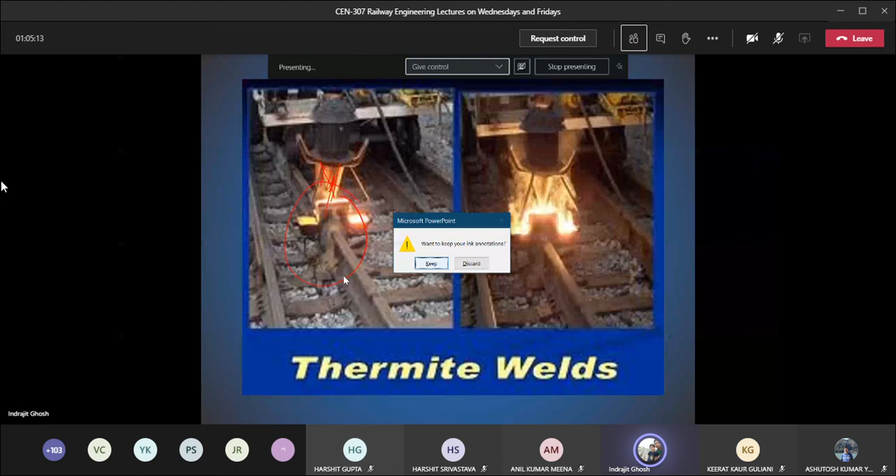Can you see my screen? Yes sir. So here you can see the concrete sleeper, now embedded in the ballast, and rail lines are being laid. Let us see what they are trying to do.

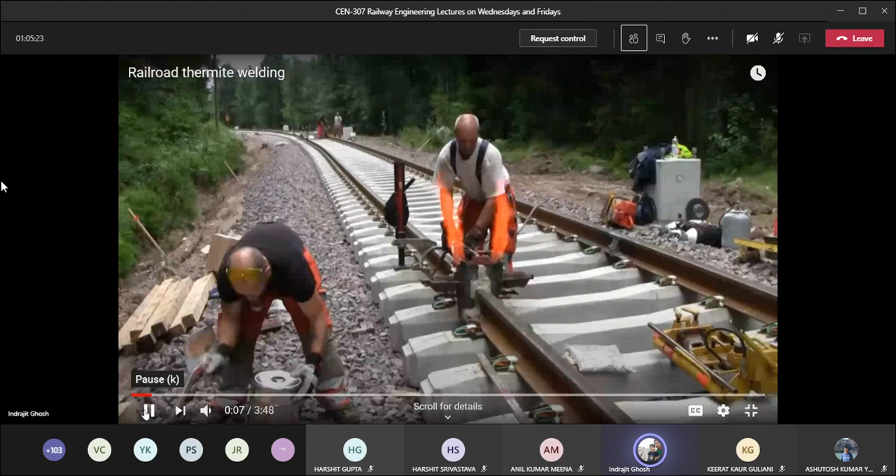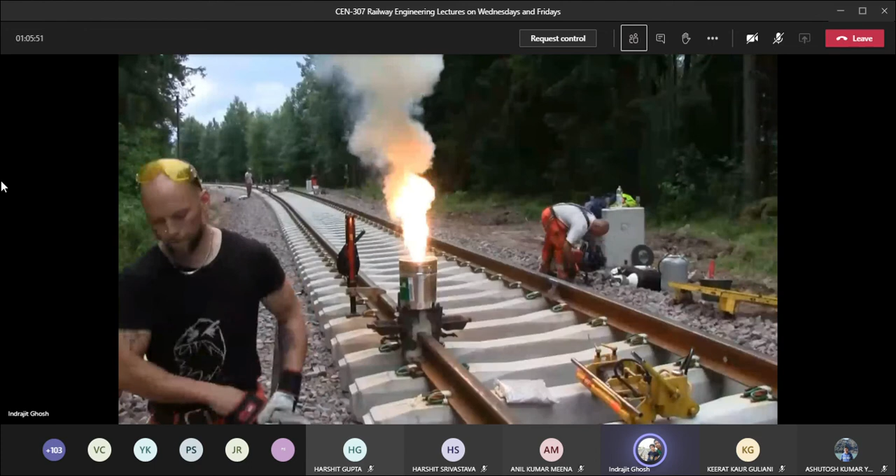They have some kind of mold here. Ignition. Aluminium and Fe2O3 are in powder form. This particular mixture is known as the thermite mixture.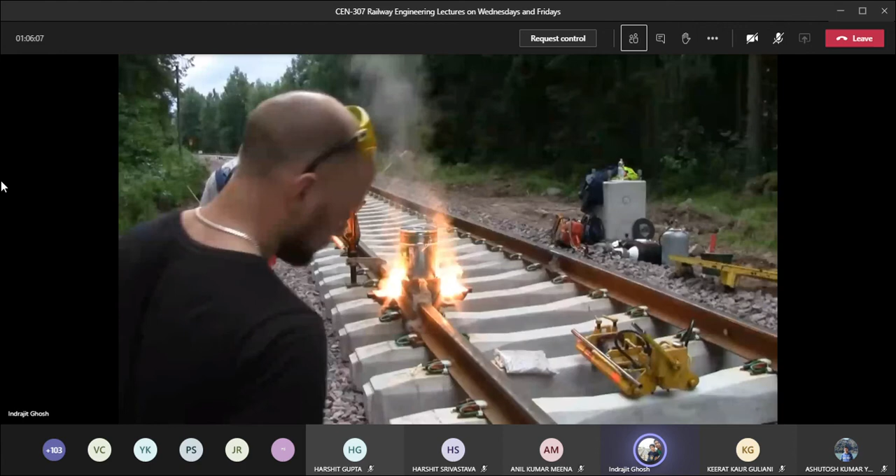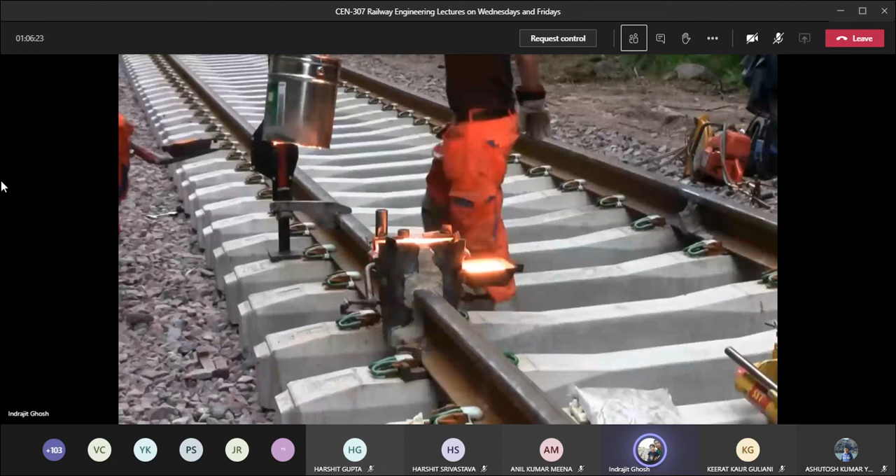Those are available with the railway authorities. They put it in that particular container and make sure it is ignited. There is the chemical reaction, exothermic, huge amounts of heat getting generated. So the end product is Al2O3 and Fe.

Now they are dismantling the mold. Those white things are basically the aluminium oxide. That is the slag.

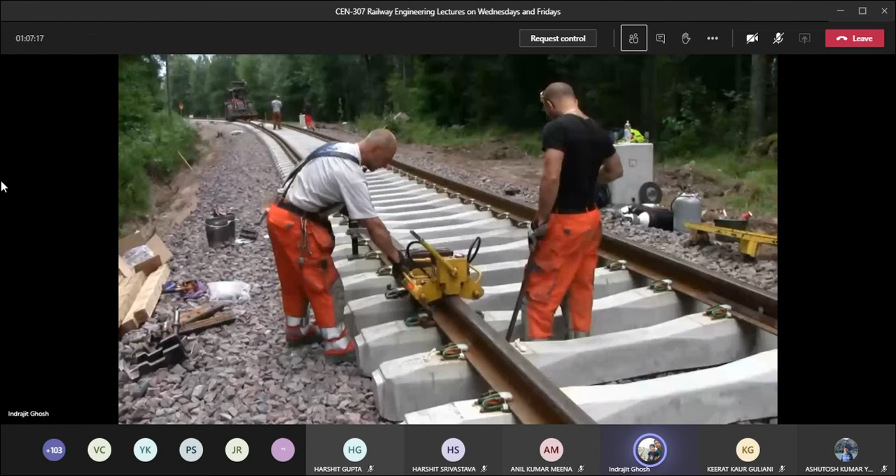They have some kind of devices in order to do the finishing touch. This particular yellow device has the shape of the rail head.

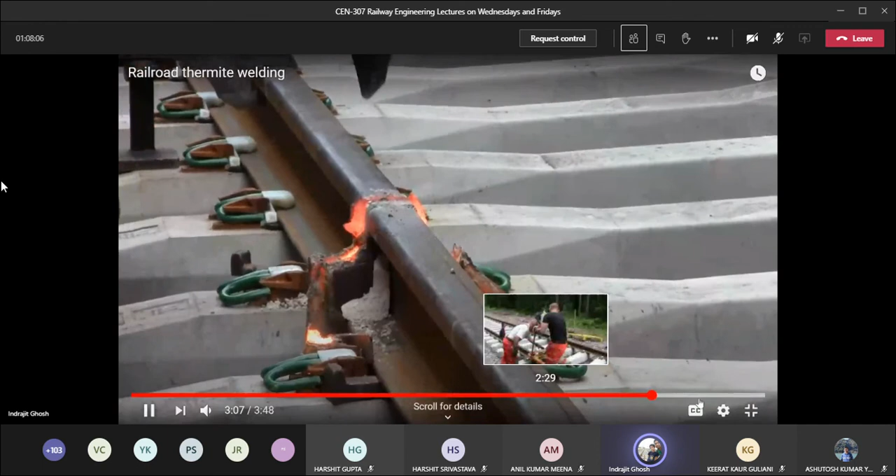So Fe is deposited at the joint. They are using the hammer, and at the same time they have some kind of equipment to give it a very smooth finish.